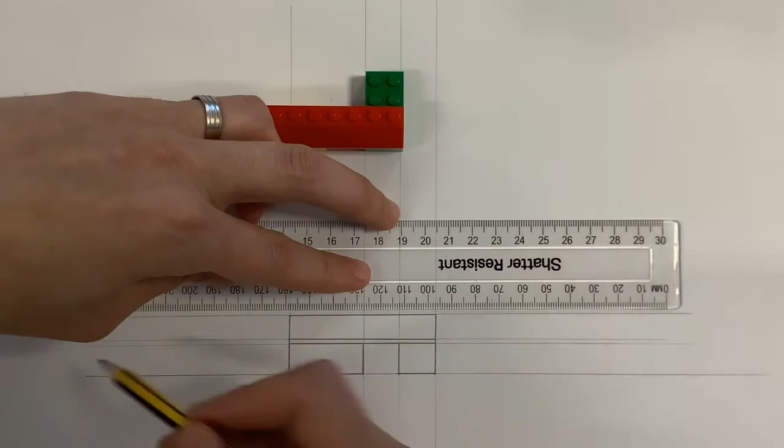And then what I can do is I can mark the width of each stud and the gap in between them. Now again, I'm approximating the measurements of these, but they should be pretty evenly spaced along the top. And there is 8 of them, and they would all get firm outlines. I've not used a ruler for that bit, but you could if you wanted to, just to get it a little neater, a little more accurate.

And what that does is it gives me the elevation of my object, and what I'd be able to do then is add a bit of colour to it, just to indicate the different blocks that are there. So my red block would be along the top. Just to show the clear difference to them. Now, normally in an orthographic, we wouldn't render them. We wouldn't add colour to them in any way. However, this is going to be quite useful for us being able to tell the difference between our different surfaces and our different blocks, which is going to be really important as we go into our other views.

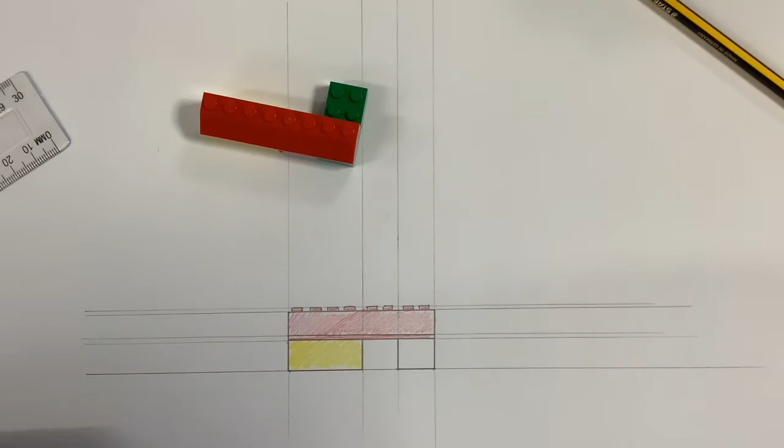So the yellow one is underneath there, and the green one would sit just below that one as well. So now that I've got that, what I can do is I can start looking at some of my other views. Now it's really important to consider where you're placing these other views. So we've got our elevation, which is the front, which should be visible right in the middle of our page. Our plan view is a view from above, and it's positioned directly above our elevation, essentially flipping it like that so we can get a bird's eye view.

So you can see in this view, the yellow block is entirely obstructed. We can't see any of that at all. And we can't see half of the green block, but we can tell how far back it goes. So what I'll do is I'm going to consider placing this a little bit further up, just so it stays in shot so I can see it. And I'm going to start where I'm going to have my front edge of that red block, which will be a little bit above the elevation. So I get my line going across here. That creates that front edge.

And again, you can't tell when we're looking at our plan view that that surface is sloping, certainly not in an orthographic. But you can see about halfway back, we've got this line here, which is the top edge of it. And then we've got this back edge of that block. So I'm going to mark the overall thickness of that red block, which is about there. I'm going to take that across. And what I'm then going to do is I'm going to mark the depth of my green block. Now I'm not going to mark that one all the way across, because it's not going to help me with too many of the views, and it might mean that I accidentally add too much information to it.

What I'm going to do then is I'm going to add this line here, which, like I said, is about halfway back. And then what that would allow me to do is mark again the position of all my little studs. Before I do that, I'm just going to mark in the perimeter of the rest of my object. You can see the green one doesn't travel all the way. It does go underneath, and we'll talk about things like hidden detail in other videos, but just now we're just doing it without any hidden detail. If we can't see it, we're not drawing it. And I'll add that line in there.

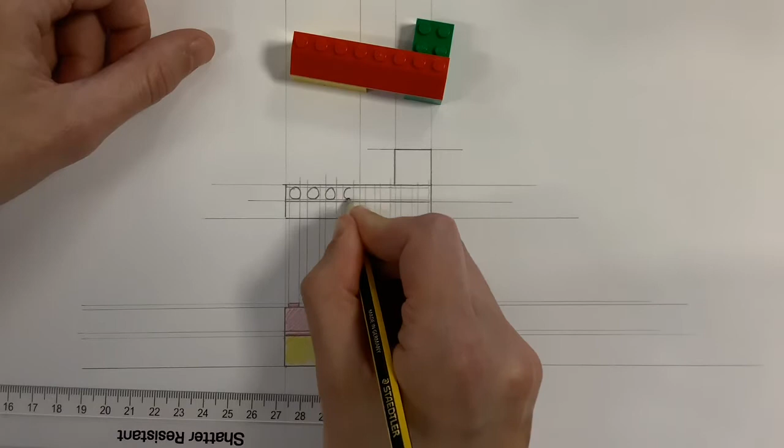So each of these getting projected up, and what that's going to allow me to do is get the exact position of each one of those little studs, because what I'm going to do is I'm actually going to form a little square to sketch in all of the little circular stud shapes. So I'm getting the same space up there and the same space in there, and what it then means is in each one of these I can sketch in my circles, and they should be consistent in size, they should be consistent in spacing, as best as you can.

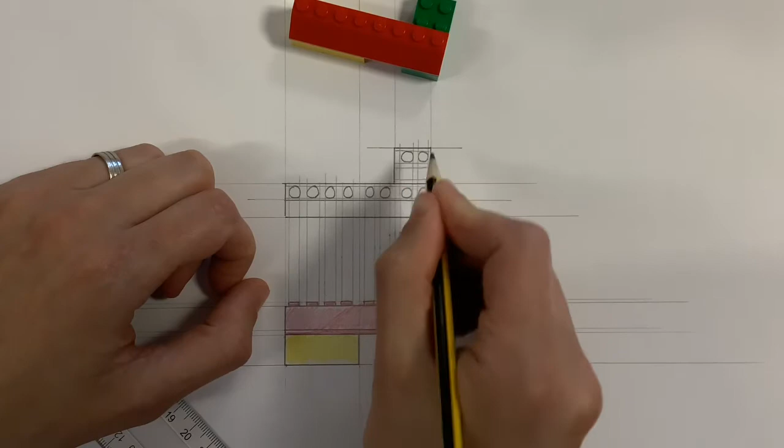And again, I could do the exact same thing, because the alignment of the studs on the green block would be exactly the same as it would be on the red block. Difference being that there should be 4 visible on the green block at the back. So again, adding them in. And again, what you'll be able to do is add some colour to that, just to indicate the 2 different blocks.

So the reason I tend to do the plan and the elevation first is because they're the ones that are most easily identifiable. A lot of time we get a little bit of confusion of what elevation or end elevation should go where. So I'll add in a green just to indicate that as well. And again, the colours are there just to represent. We're not worried too much about the quality of the rendering. That's something we'll pick up in later videos.

Now, in terms of your end elevations, that's your view from the left and from the right, it's really, really important that you put them in the correct position. Now, when we're doing orthographics, we work using what's called third angle projection, and there is a first angle, but we work in third angle projection. And basically what that means is our elevation is the front, our plan, which is the view from above, is placed above, and our view of the left-hand side is put in the left-hand side of the page. Our view of the right-hand side of the object is put in the right-hand side of the page.

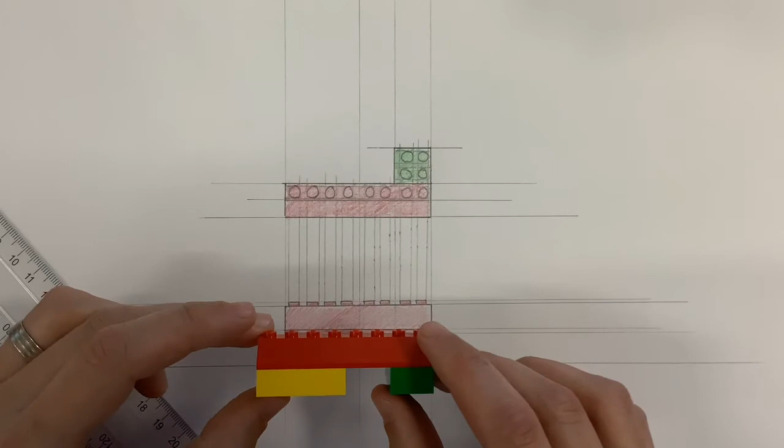So what it means is you have to flip your object round to look at the left-hand surface so you can put it on the left-hand side of the page. So to get us to see our left-hand surface, it means turning it this way. I'll put it there just so we can see it a little bit more clearly. And you can see when looking at that left-hand surface, we now can see the yellow block, we can see the slope of the red block, and we can just see the green block sticking out at the back.

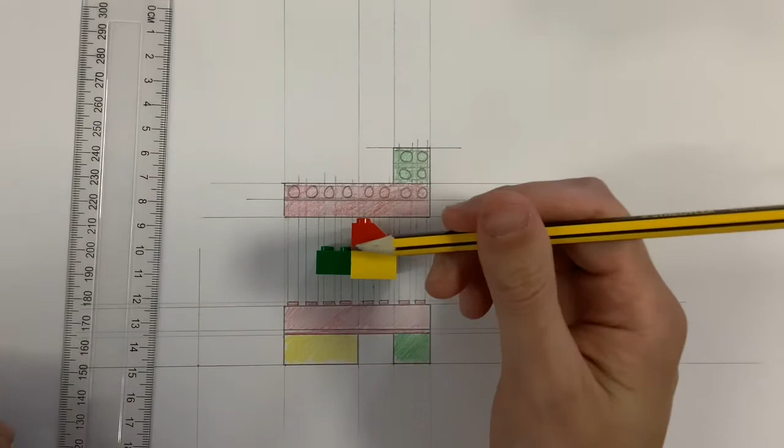So what I'm going to do is I'm going to pick a starting point, which is over here, and that's going to be the front edge of our yellow block. I'm going to project that up, and then I'm going to set the depth of our yellow block, which happens to be the depth of our red block as well. And then I'm also going to set the depth of our green block, which is exactly the same distance as the yellow block is. So that size there and that size there should be the same. So I'll add that into here as well.

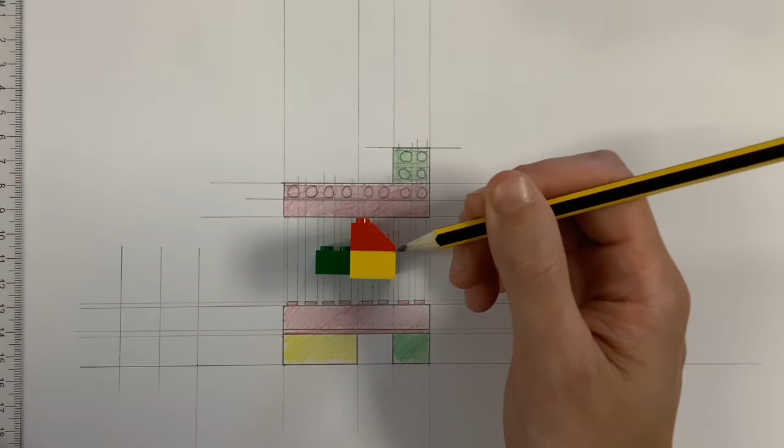Because I've projected lots of these lines across from the back, what I'm able to do is use some of these to help me get the rest of the object set up. The only size that I'm missing at the moment is that depth going back on that slope. I've got the start of the slope, I've got how far back it would slope back there, I just need to add this back in. I can obtain it from looking here. I can look there and say, well, what distance did I choose there? I need to add that in, which was about halfway. Again, what I could do is I could project it all the way down. But what I'm going to do is I'm just going to look for what dots I have to join together.

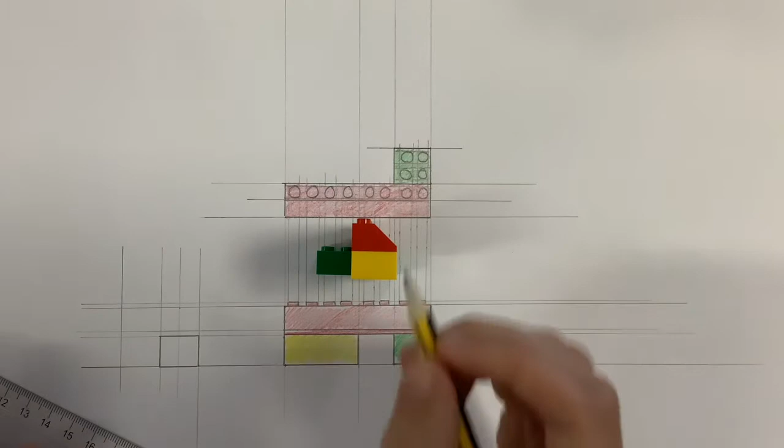I'm going to start by completing my yellow block, which would be here. Just a simple little rectangle, very similar to what we did for the elevation for that one here, because we're now looking at the side of that yellow block. So we're looking at that left-hand side, I've added that in. What I can then do is I can add the back edge of the red block, which doesn't go all the way to that top line. Remember, that top line is for our little press studs to clip the blocks together.

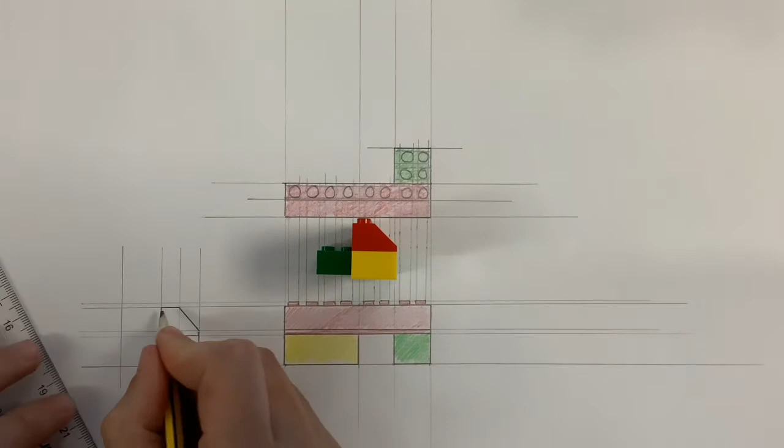So I'm going to transfer my size across to here. And then rather than joining right down to that bottom corner, my slope joins to this second line up, and I add that in there. And then what I'm able to do is add my little stud on the front there, or on the top even, and that means I've now got this shape and this shape. All that I'm left to add is the end here for my green block. Add that in, add the bottom for it.

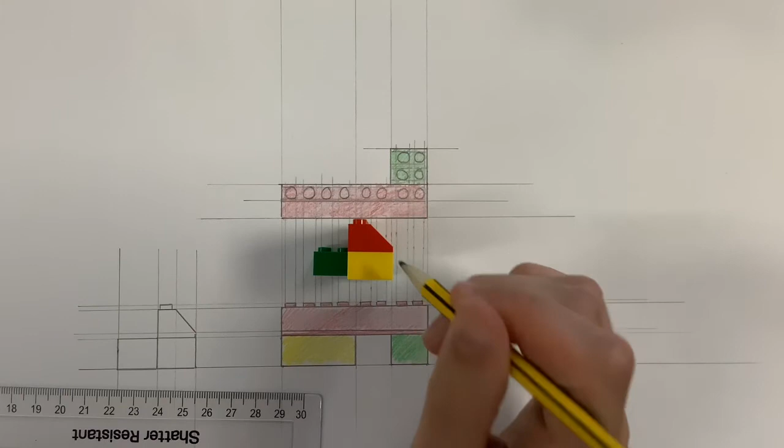Now, because there's nothing stacked on top of that green block, I can actually see those press studs. Those little studs just happen to be the same height as the start of that slope. So what I can do is I can use this line that I took across and add in my studs at the same spacing.

And what I've then got in terms of this one is I'm able to add the green, add in the yellow, and then also add in the red on the top. Now, even though when you're looking at this object on the camera, we know that that green block is further away and it looks as though it has become a little bit smaller just because of the perspective of the camera and the perspective of our eye.

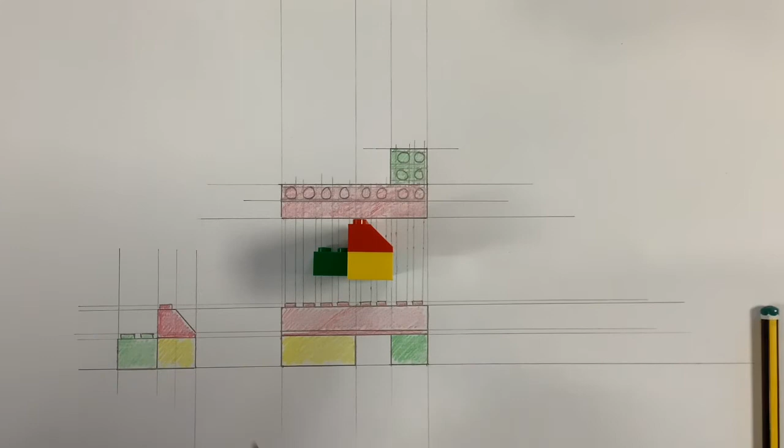We don't show it as being any further away. We show it as if it's been photographed and it's been flattened out. So even though we know that's further back, this view doesn't give that away to us. It's only from these sorts of views that we can tell that it's placed further away.

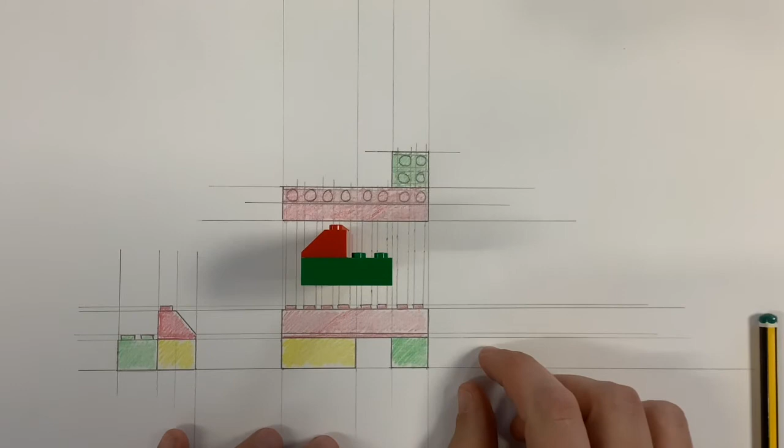So now for the right-hand side of the object, we just flip it around the other way and we put that on the right-hand side of the object. This time the yellow block is completely out of view, very similar to what was in our plan view. We've got the red, this time sloping in the other direction, and we've got the full length of the green block there. Actually, the whole depth and height is going to be exactly the same as our left end elevation, but what we need to do is turn it to face the other way.

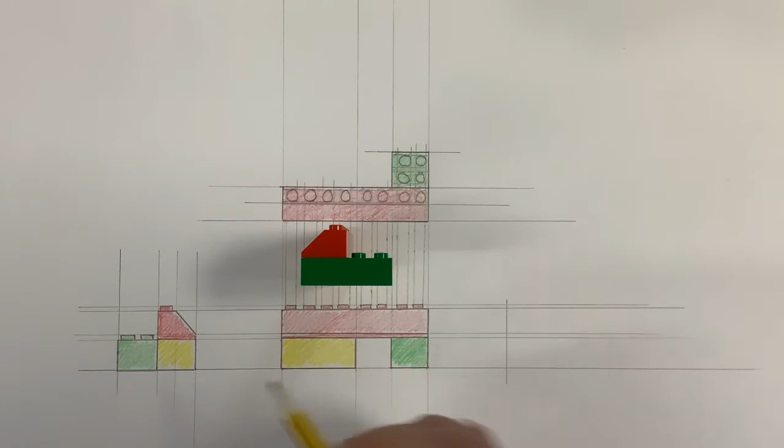So very similar process. Mark our starting edge here, which will give us the front of the green block this time and the front edge of the red. And then we mark the depth of it, again, which should be exactly the same as this depth over here, or as close as you can make it in proportion. And then the same again one more time.

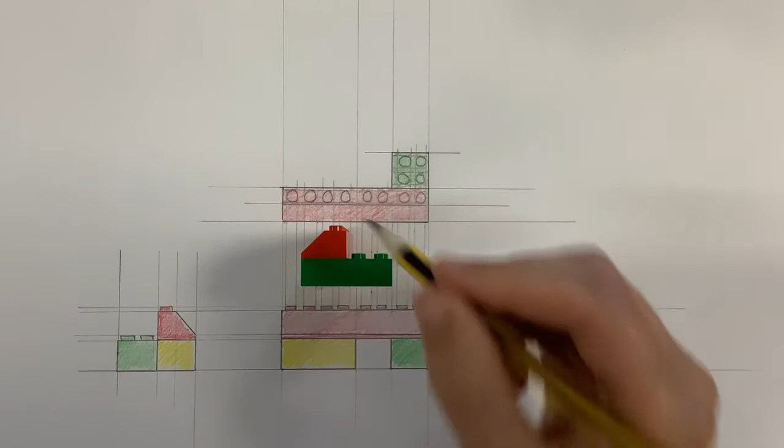We know already where the sloping edge of this red block starts and finishes. We just need to add where this point is, which is approximately halfway. I'm not going to bother extending that all the way up and down because it's not going to give us any more extra information at this time. All I'm going to do is join it to that front edge. Because we've already been through that process, it's a little shortcut we can take at this stage.

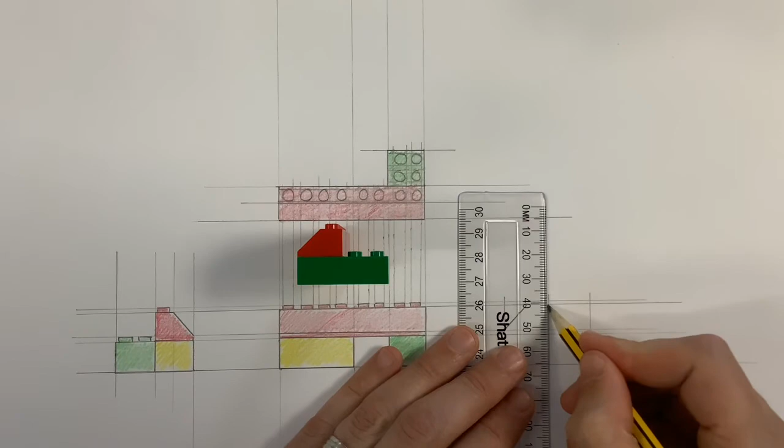It then means I can round off the rest of my red block. Remember, not going to that very top edge because we know that's for our little press studs. I am going to extend the line all the way back because that's going to form the edge here of our green block. I'm going to bring this down to the front and this one here. And then last of all, I'm going to add my lines at the top and at the bottom.

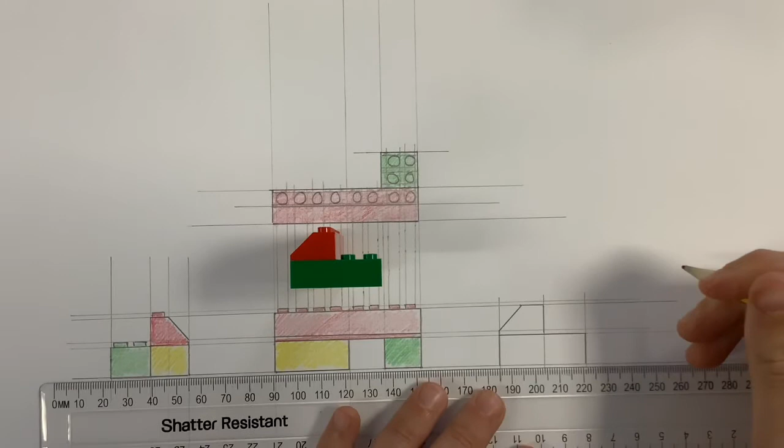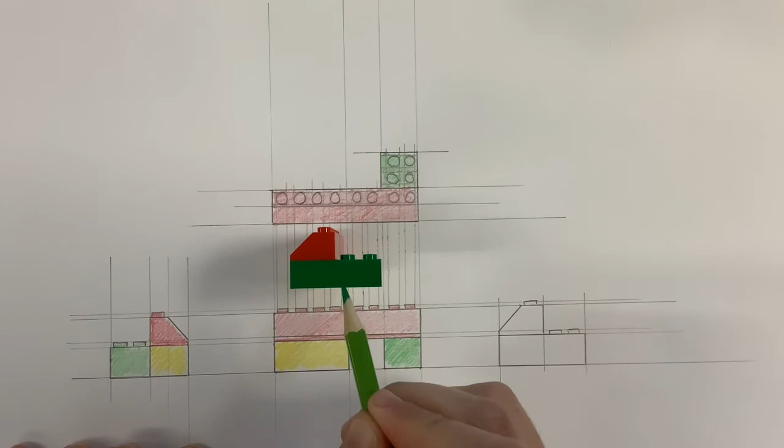And then all that's left to add in is our little press studs again at the top here. Just a single one on top of the red one, but we know we can see two on the green one. I've not added that line through the middle there. I've not turned that into a solid outline. I've left that as a construction line because although we know that yellow one's behind it, we can't see it based on the view we're looking at. So we don't add that line in just now. But in later videos, when we look at hidden detail, you would see that. So adding in the green there to show that, and adding in the red as well.

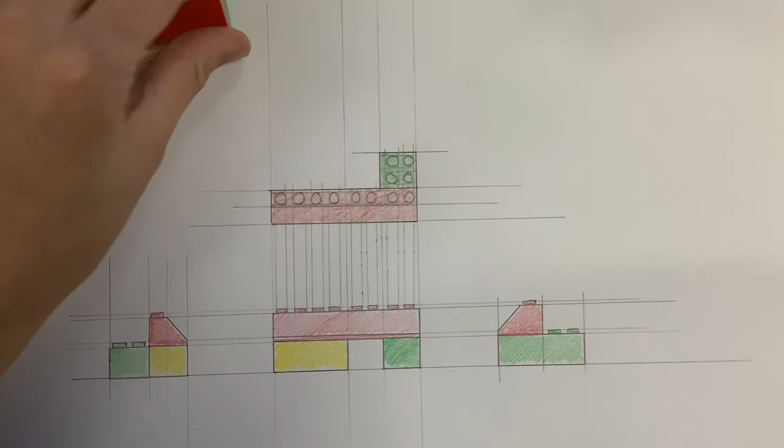Now the last thing that we would do in terms of this orthographic is we would just add our view labels. Really important that we label them nice and clearly so people know what view we're looking at. So we've got our elevation from the front. It's always written in block capitals. So we've got our elevation, we've got our plan, we've got our right end elevation, and then we've got our left end elevation at the other side.

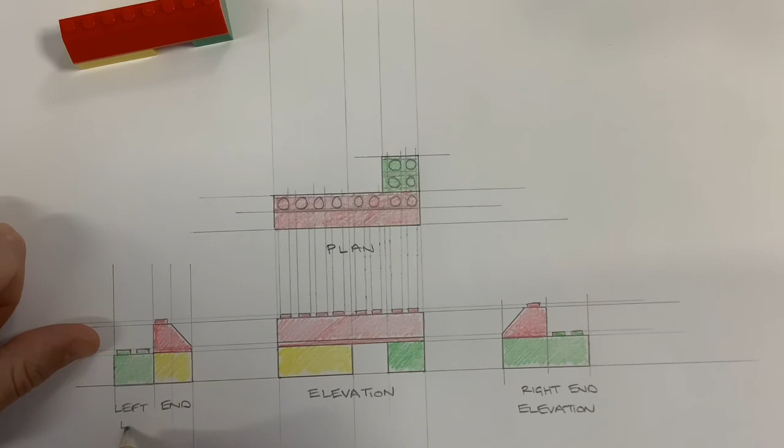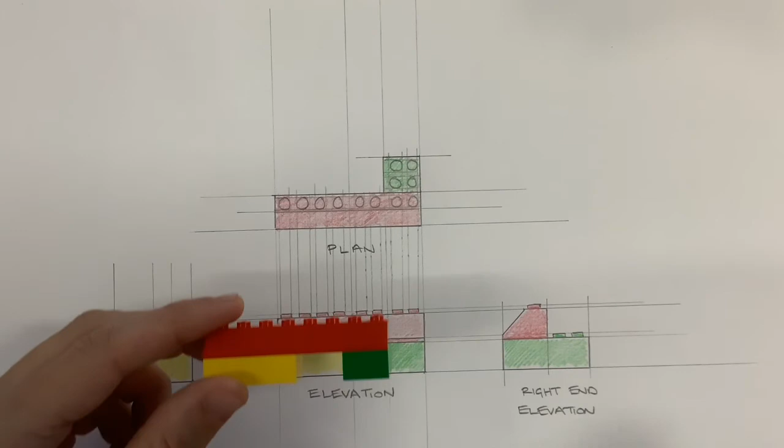Now by doing that, what we've been able to do is give the person viewing the drawing a clear understanding of how this object looks from all views. We've got our view from the front, which is our elevation. We've got our view from the top, which is our plan. We've got the view from the left, which is our left end elevation. And then we've got our view from the right, which is our right end elevation.

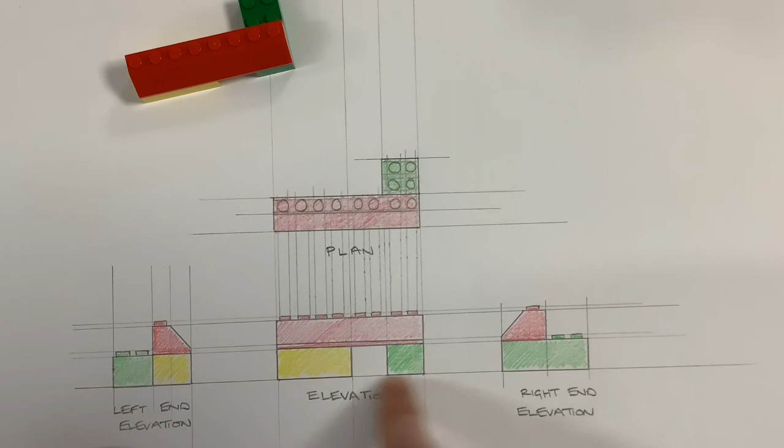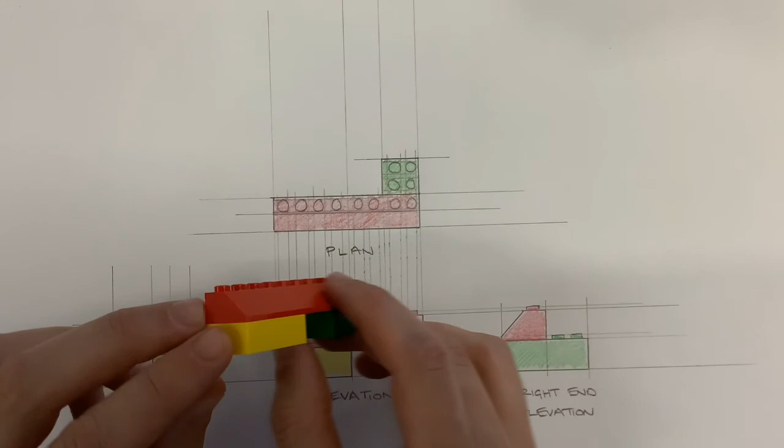You'll notice that the height is consistent all the way across the elevations. The length of the elevation is the exact same length as the plan. And the depth of the plan is the same depth as both of the end elevations. Because just because we've rotated it through different views, it doesn't mean it's changed size. Okay, so just because we walk around the corner doesn't mean it's getting any taller, any shorter. And that's why we've used that projection method to try and keep everything in line to make sure that all the sizes are consistent and in proportion.